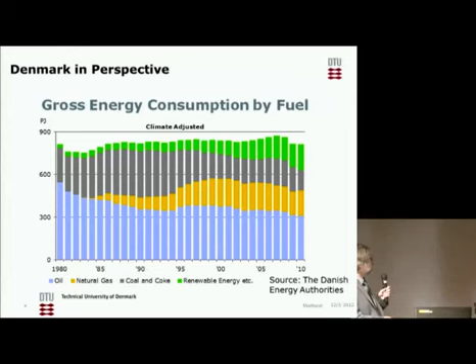So for that reason, I believe that, although we are a small country, it has been possible for us to decouple the energy growth from the economic growth. So economic growth has certainly pursued, and we have kept the energy consumption at a stable level.

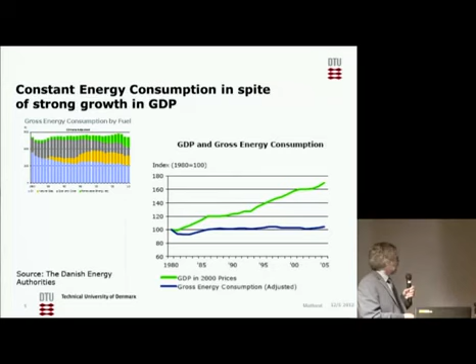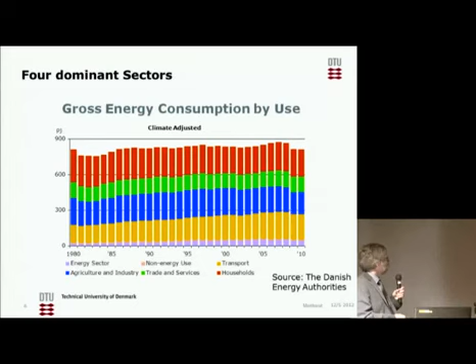The oil production is going down, natural gas is going down as well, and by the year 2015, we actually expect that we are going to have a net import of oil and natural gas. So that's one of the reasons that we need to look into other possibilities for energy resources. And actually, we've done that for quite a long time.

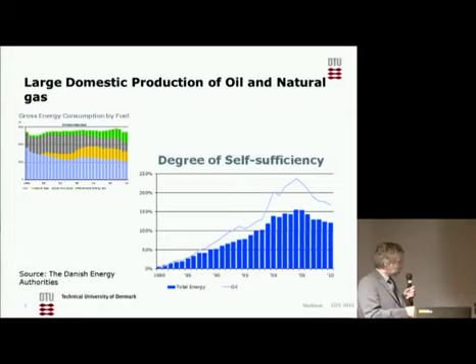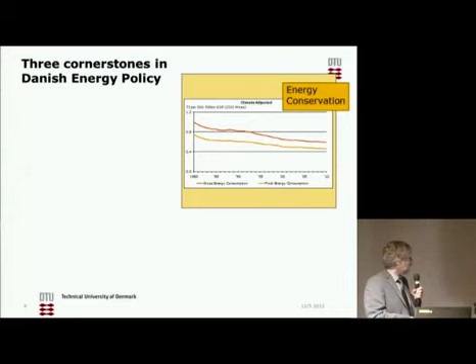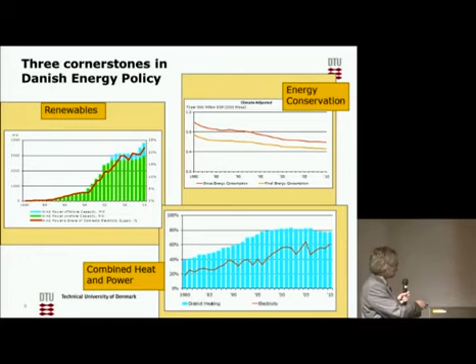And again, I think you have quite a high reliance on combined heat and power in Japan, as we have in Denmark, so I believe it's quite a common feature. The last part is actually our development of renewables. This one shown up here is wind power, and as you can see, we started back in the 80s, and then we've had a quite rapid development of wind power, and now almost 25% of our power consumption in Denmark is based on wind power.

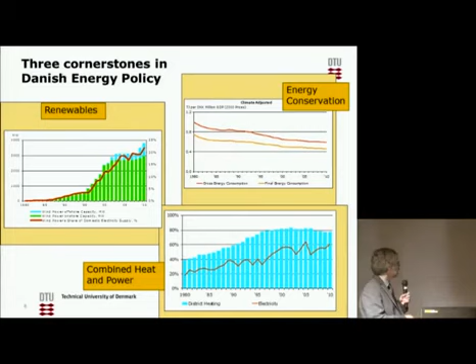In recent years, it has not only been land-based wind turbines, but also offshore wind turbines. And I've actually looked a little more into detail with the development of wind power. It's shown again on this one. And with these 25% we have succeeded in gaining up here, we've been a little bit stable for the last years. Actually, we introduced a new regulation here, and to a certain extent, it halted the development of wind power a little bit. But now we are back on track again.

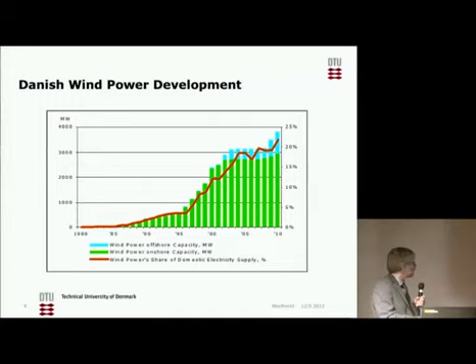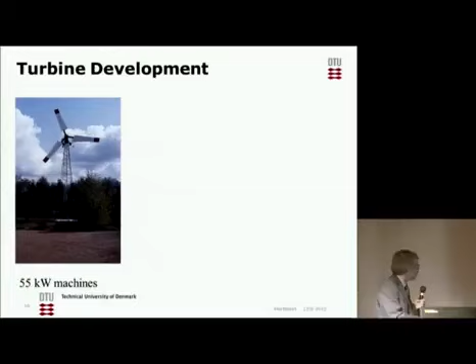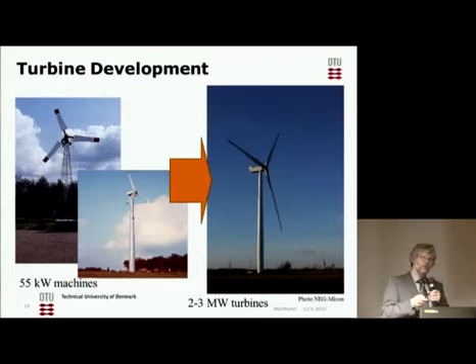So if we look into the development of wind turbines, then we actually see that they have developed from quite small machines back in the beginning of the 80s. We simply built thousands of these small ones and put them up all over the country, as shown on these two pictures here. And then we have actually converted it into large 2-3 megawatt turbines that are much taller and produce much more energy than we have seen before. So this is actually the picture of how the turbines have developed from the small ones at the beginning of the 80s to large megawatt machines, which actually are those being installed, especially offshore by now.

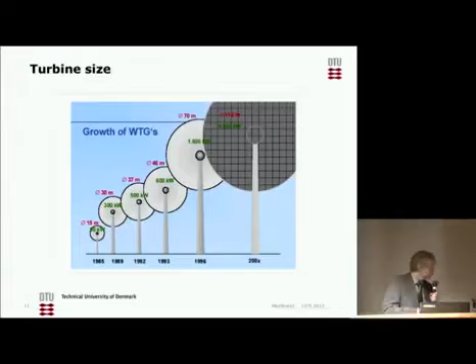So what has happened with this upscaling of turbines? Of course, one of the issues has been that it's driven down the cost of the turbines. And actually what we have seen is that now the large 5 megawatt machine is there. It has a rotor diameter of up to 120 meters. Now we are certainly looking into some structures. Now it is advanced machines. It's not the same as when we at the beginning of the 80s developed the small machines around the corner at the blacksmiths. Now they are advanced and certainly produced at highly technical manufacturing machineries.

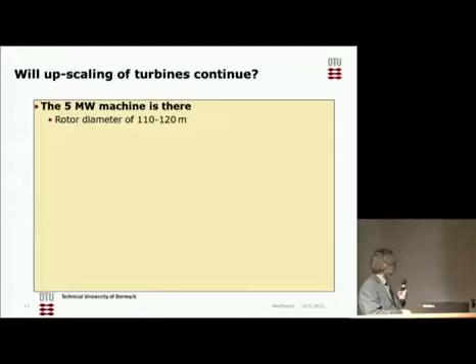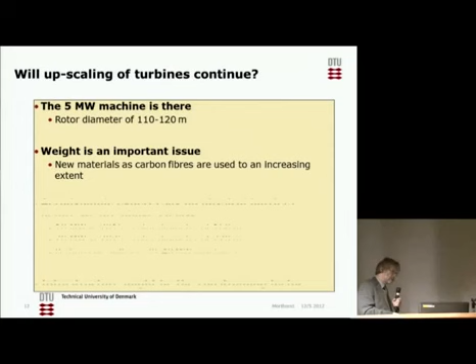Weight is an important issue. Now we're trying to keep down the weight using new different materials, carbon fibers and so on. And the question is, how far can we actually go in this upscaling? How far can we go in trying to push down the cost of wind power?

And I've actually spoken to the experts at my lab, and they say that, well, in 5 years' time we will have the large 10 megawatt machines, and they will have a rotor diameter of up to 160 meters. But we will probably not stop there. In 2025, in 12, 13 years from now, we will see perhaps even larger machines, 20 megawatt machines with a rotor diameter of up to 220 meters.

Compared to these, the Airbus A380 that I was using when I flew out here is actually a very small machine compared to these large structures of wind turbines. Most of them will be used offshore, but of course part of them will be used on land as well.

And actually on land we might see that the infrastructure might be a constraining factor. It might be difficult to get different kinds of lorries and so on to transport the machines out to where they're going to be set up, unless they are smaller in size than the big ones shown up here.

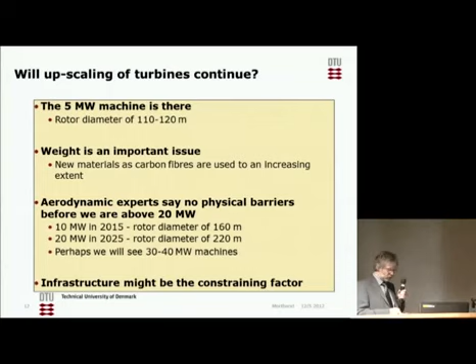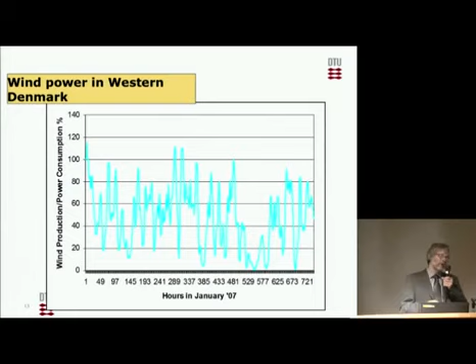So we have to export it. So it means that up here, over here, we force an export to Germany and to Norway in these cases. Until now, I must admit that we have done that without having any technical problems. But of course, it has some problems, you might say, especially in relation to the marketplace.

If we look at this month, we achieved approximately 44% of all power consumption in Western Denmark covered by wind power. And for total Denmark, we had an average of 36%. So it's quite impressive figures. And as mentioned, these are what we see in the winter months in Denmark also today.

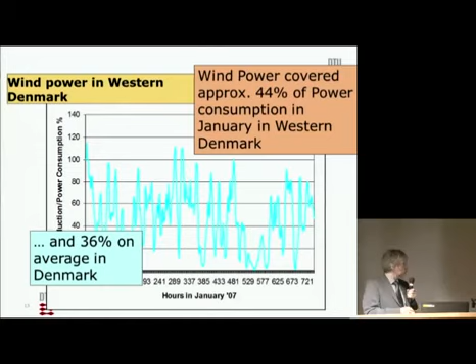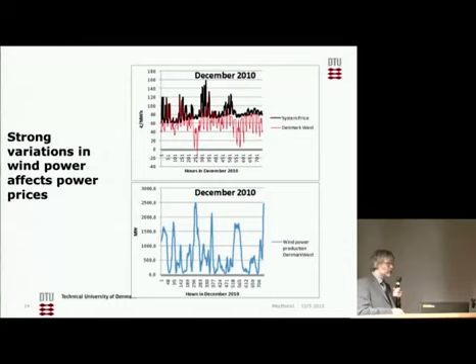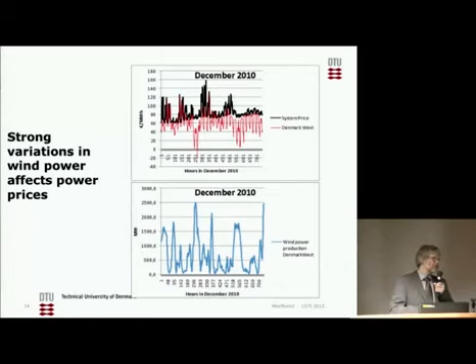And it means that all those generating power, whether a conventional power plant or a wind turbine, are losing money if they produce at that time. So for that reason, this is a signal to the producers saying, shut off your power, we don't need it now. And to a certain extent, that's also what is happening. But as you can see, not always. However, these negative prices are very seldom. And of course, we want the system to react to these negative prices. That's what should be happening.

Now, let's move to the way we have managed to integrate these different kinds of renewables and how we have put up our support schemes in Denmark. I have four requirements for the support scheme. The first one is that it should promote the effective development of renewables. We should have a strong promotion of renewables, a strong development of these renewables.

The second one is that it should be attractive to entrepreneurs and developers, because there's not so much competition in this area. For that reason, it's very important that we get a low risk so we can attract as many investors as possible. And at the same time, this low risk will imply the lowest cost for society at large. My third requirement is that it should be attractive to investors. It means a fairly high feed-in tariff, for instance.

At the other side, the support scheme should make it possible to drive down the cost of new renewable technologies. I think this is immensely important because at the end, of course, if renewables are going to play a large role in our system, then they should be competitive to other kinds of plants.

To introduce renewables is not like playing in a kindergarten. We cannot go on supporting all the time. At some point, they should grow up, and they should actually be possible to make them compete with conventional technologies. So for that reason, it is very important that the support scheme can drive down the cost of the new renewables, sliding down the learning curve, as you probably know it.

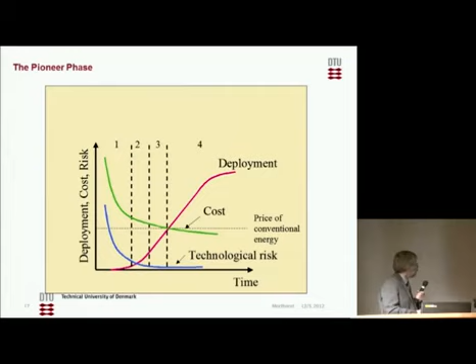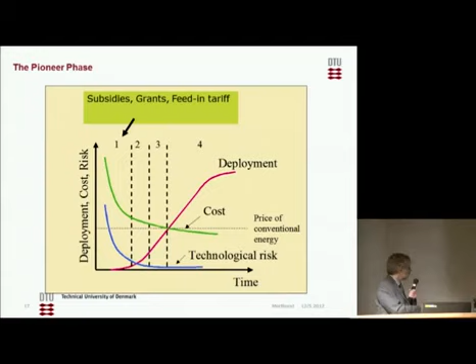And of course, if we look into the first phase, the pioneering phase, then it is characterized by quite high cost, and quite high technological risk. And of course, it's immensely important that these technological risks have come down before we really have the takeoff for the deployment of renewable sources. It means that in this first phase, there should be subsidies, grants, perhaps some kind of feed-in tariff at quite a high level, as we have seen in most markets until now.

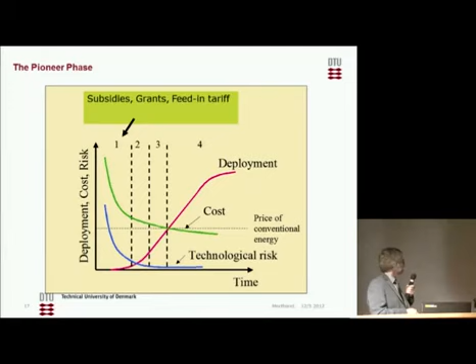Now, if we move on to the second phase, then there's much more takeoff. Now renewables really start to get important. The cost has come down, the technological risks are much lower, and for that reason we can actually start deployment at a more rapid pace. So feed-in tariffs, as you saw from Germany, for instance, and what we have seen in Denmark as well, is a very appropriate measure of a support scheme at this level.

But at the same time, we should be aware that it is a balance regarding the level of the feed-in tariff. The higher the feed-in tariff, the more attractive it will be for investors, but at the same time the more costly it will be for consumers. So we should take very much care that this does not get too costly for consumers. For that reason, it's important to do some benchmarking and gradually adjust your feed-in tariff to a lower level when appropriate.

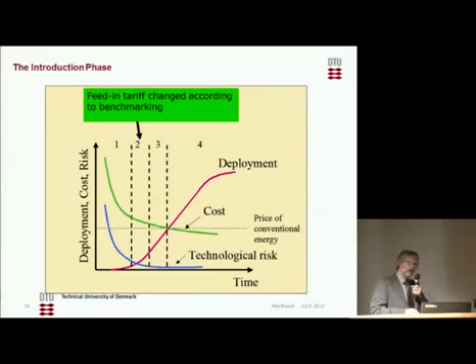At the third phase, renewables really start to get going. Now we are in rapid development, and at that time we should use some kind of differentiated feed-in tariff for the first part of it. But at the same time, it is important that this technology gets closer to the market and becomes compatible with market principles.

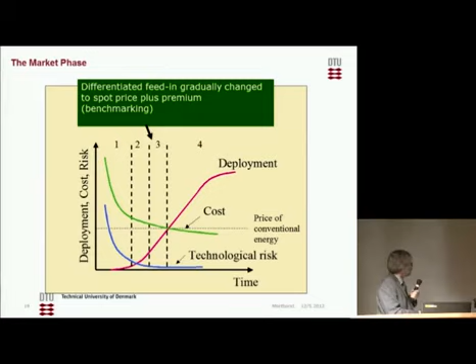And for that reason, I suggest that some kind of spot price plus premium is actually used in this phase, because it means that investors will gradually take over more of the risk that you see at the marketplace. Now, the fourth and last phase, of course, is when we move totally into commerciality. And there's not so much to be said about that — now we have reached our goal, actually.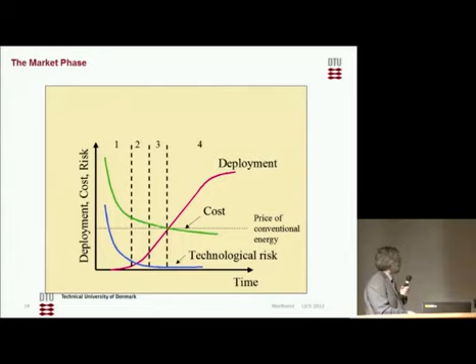So let's just touch a little bit upon the reasons why we see that in Denmark the introduction of wind power and renewables in general has been a success story. We have had much employment, much industrial development, just seen because we have introduced renewables. And actually there's a number of reasons.

Looking into wind power, we have fine wind conditions, but actually they're not the best in Europe — other countries, such as the UK, have much better conditions than we have. So this is just a prerequisite, but it's not sufficient. Right from the start, we got a very strong and positive involvement from the government. And I believe that was really important, because from the investor viewpoint, it is important that they can believe that when we set a feed-in tariff, it will actually continue through the lifetime of the technology in view.

It's important to have the right manufacturing background. We have done much within mechanical engineering in Denmark, and I think it's actually the same background you have in Japan, so it's not a drawback for you either.

We have a very pioneering spirit. We've had wind power for a long time, and that might be one of the reasons we've had strong public acceptance in Denmark. Almost all over the country, people believe wind power is the right way to go, with not very much opposition. And finally, we've had a good deal of luck, which should be mentioned too, because it is important now and then.

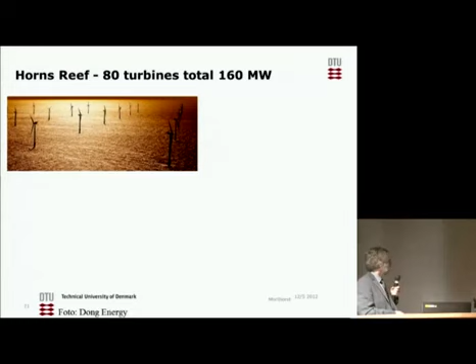Now, just a few pictures from some of our offshore development. The Horns Reef was one of the largest offshore developments we made. As you can see, large vessels are used offshore for putting up the turbines, and the turbines are kept in operation and repaired using helicopters.

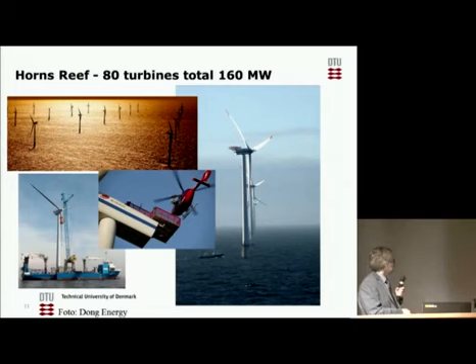Concerning offshore development, we've made a quite extensive plan looking at Danish waters, because there are different interests in the waters around us, just as you probably have around Japan — fishing interests, leisure use, environmental protections, and so on. So we made a comprehensive plan for all the areas around us and pointed out a number of areas where we could put up new offshore wind farms.

Normally we use a tendering scheme. This means that when the government has decided to put up a new wind farm, it's put out into bidding for the competitors. We tell them where to put up the wind farm and how large it should be, and there's a pre-screening of the environmental areas around it. But at the end, they have to decide what kind of wind turbines to use and what the cost will be, and the one with the lowest cost in the bidding procedure wins the tendering process.

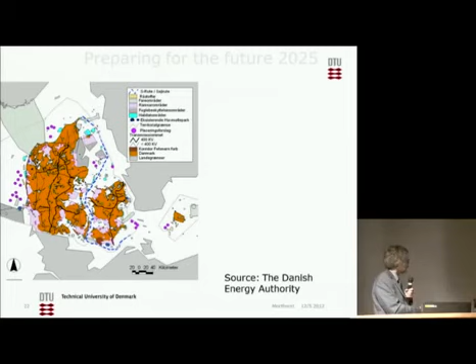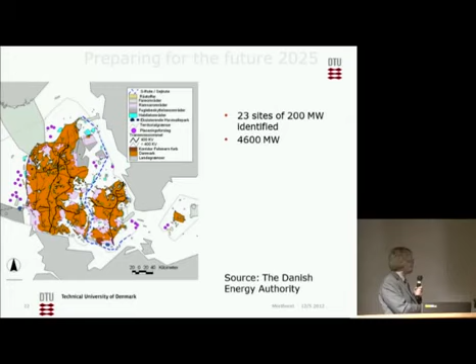I think we've been quite successful doing that in Denmark. We've identified 23 sites of 200 megawatts, and we're going to utilize most of them. In total, 4,600 megawatts is planned by now, equivalent to 8% of our total energy demand, or approximately 50% of electricity demand.

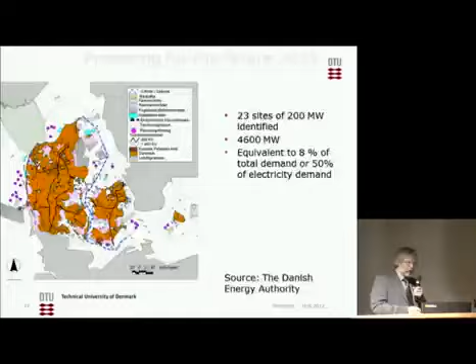So that was most of what we have been doing until now. Just a few words on where we are heading, and I will not take that long.

A couple of years ago, the Danish government set up the Danish Commission on Climate Change Policy, and it was actually our former prime minister who decided to set it up. I happen to be a member of that commission, so in general I like the conclusions quite much. One of our major conclusions was that it is possible to make Denmark independent of fossil fuels by the year 2050, but it will require a total conversion of the Danish energy system. Moreover, we can do it without excessive cost to the consumers — but I'll come back to that a little bit.

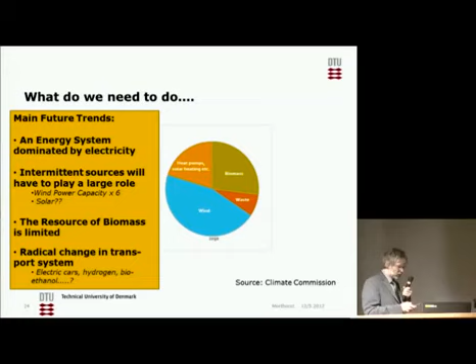Finally, we will see radical changes in the transport system. It might be electrical cars, for instance, but we don't know that yet.

This plan from the Climate Commission was taken up very seriously by the Danish government, so they made their own plan. This plan was just passed through Parliament not more than 3 weeks ago, and 95% of the Danish Parliament actually voted for the new energy plan. So it shows that not only Parliament but Danish society is really ready to go for this radical change in the energy system in the future.

So how does the government energy plan look? Well, first of all, we need to go from fossil fuels to renewables, as shown here by 2050. We have 4 steps in the plan.

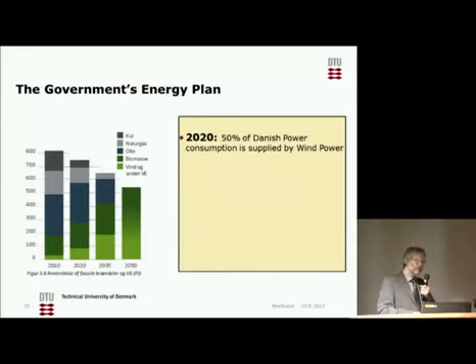By 2020, just 8 years from now, 50% of Danish power consumption should be supplied entirely by wind power. Today we have 25%, so in only 8 years we have to double this share of wind power. It's certainly a challenge, but the Danish TSO, the transmission system operator, tells us it is possible.

The next step is that by 2030 there will be no coal used in Danish power plants, and there will be no oil furnaces. As you saw in some of my figures before, we had quite a reliance on coal still, but nevertheless it will be totally phased out and everything will be on renewables.

By 2035, all heat and power is supplied by renewables. So what is lacking in 2035 is only the transport area, and that will actually be taken care of in the last 15 years. So by 2050, the entire Danish energy consumption will be supplied by renewables.

So I think we are a little bit more ambitious than what you saw for Germany. Although they are very ambitious in Germany, we are a little bit ahead in Denmark, and we are happy to be that, actually.

So it is an ambitious schedule, and at the same time it could be said that the Danish government, the Danish population, the Danish country as such, society at large, is behind it.

And of course, it will cost a little bit more. But the scheduled, estimated cost by 2050 says that it can be done for something like 100 euros per family per year in 2050. And it should be within reach to do so.